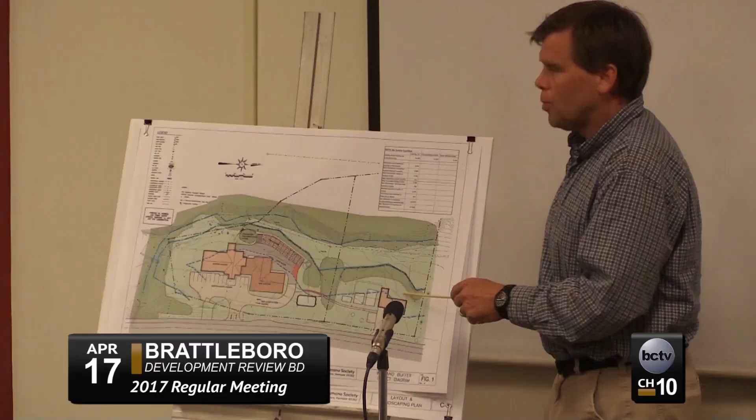And those uses are, so this is rural residential and animal sheltering. What's that? Animal sheltering. And the use that we're looking for is for animal shelter, but really just administrative and storage functions in this property, in this house here.

So storage of animals or storage of gear? There is an existing pool deck here that is proposed to be removed, and then eventually they would like to be able to put some kennels for some outdoor time on this south side of the house, so that this property will be connected by a path here.

How close are the closest neighbors that might be able to hear barking? There's a neighbor - Brian's right here, and he's the next property over. To the King property, it's 50 feet. Pretty close. So you're sort of just in that white area off to the side?

Yes, probably. Can you just identify yourself? Brian Young, 962 West River Road. Did I swear you in? Yes.

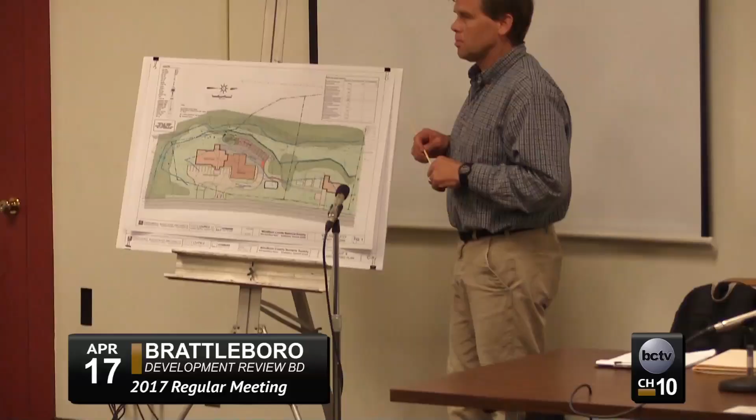So the kennels or open area, whatever you want to call it, when would those be in use? That would be during business hours, 12 to 5. It's not for overnight boarding, or for early morning or late evening use. It would just be the ability to get some more kennel space for crowding purposes. Would there be any strange lighting on the building that you'd be adding? No.

What would the use of that driveway be? The same as it's currently. You pull in and then there's a couple dirt parking spaces. We've probably formalized that, but the same. There's a garage and 2 parking spaces.

And it would just be a couple employees parked there rather than the tenants? Staff. The idea is not to have clients or customers come to the King House. This is strictly office and administration over here, with the exception of that outdoor area. Landscaping's not going to change? Landscaping's not going to change.

I should tell you that, as you saw in the letter, the property is subject to the Vermont wetland rules, and we've secured an individual wetland permit. The wetland is this darker blue line here, and whether or not it's a Class 2 wetland is up for debate, but the state took jurisdiction over it, so they asked us to get an individual permit. Among the constraints on this property, this wetland provided some significant challenges for us for developing this property.

So to answer your question about landscaping, currently there's a backyard with a septic system here, and they've asked us to do our best to revegetate the buffer.

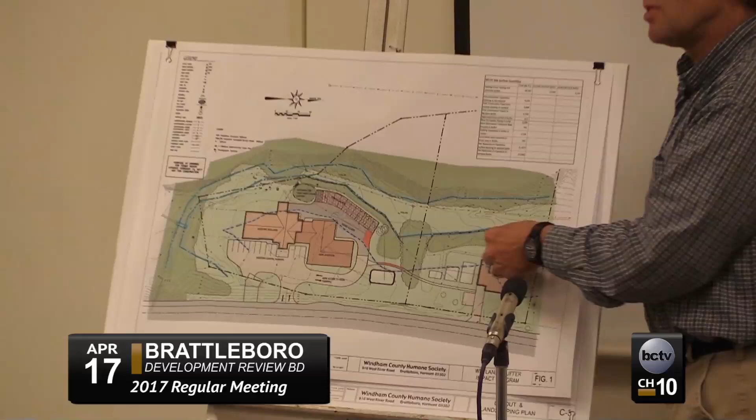So this lighter blue line is the 50-foot setback, and we're going to revegetate some of this buffer area along it. It's sort of the standard native species, native wetland species.

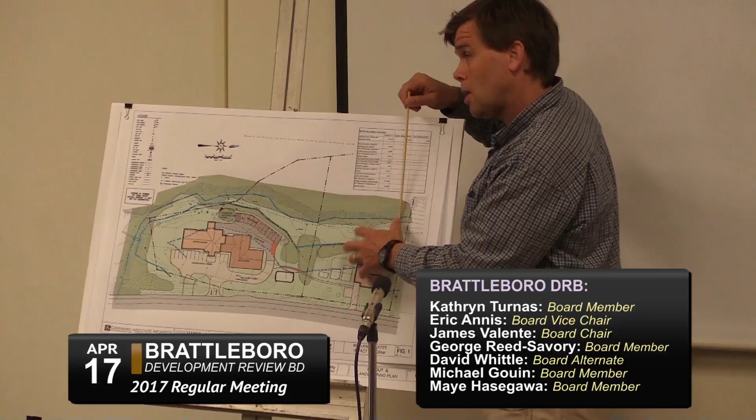Are there any runoff issues towards that abutter on the side there? No. There's a wash or gully that comes down off the hill here and lands on the King property house. The soils here are extremely well draining, sands and gravels, and this runoff doesn't even leave the property. It all infiltrates very quickly.

There's a bit of a low swale that runs the length of this and crosses the highway here, and that's largely dry 80% of the time, despite the fact this is a seasonal stream. It runs quite often and quite steady, but it never makes it off the property.

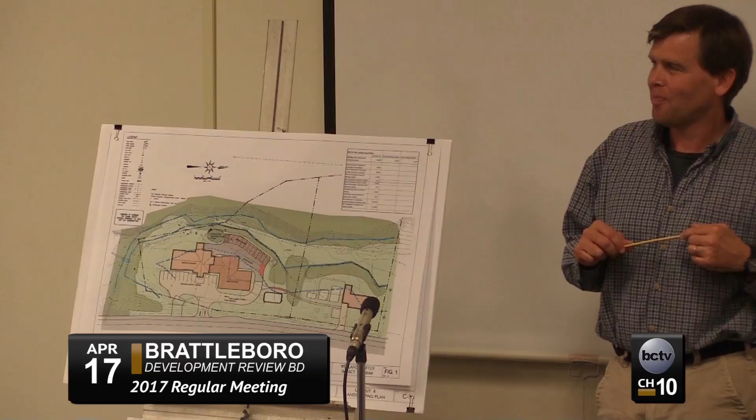I was just wondering if we put conditions on our last permit. Do you know? Well, we got a gentleman with the permit here. Sorry, your name was Brian? Brian Young. I've got it here, it's gonna go up to the line. Would it be all right if I just looked at it for a second? Yeah, I was hoping you would have it.

But your speculation isn't too far off, because what has happened is the runoff off the hill has come down and periodically fills up this area, and the water has pushed over into the yard. Over time, previous owners have redirected the water away from the house. So if you just let this run consistently, it might fill in down there again.

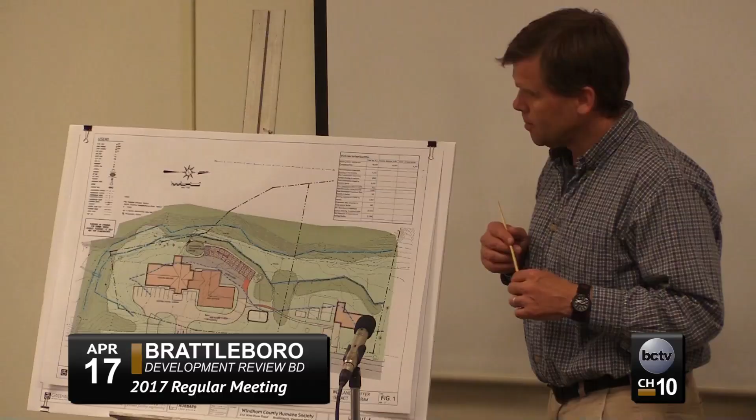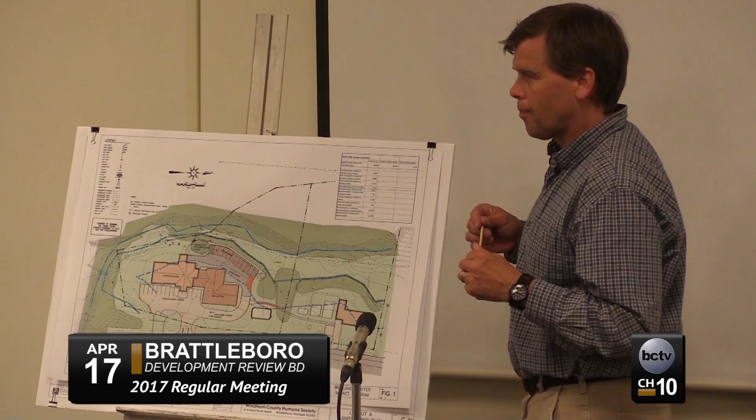Is the amount of visitors going to change as a consequence of this at all? No, maybe a slight increase here, but not significantly. Between 5 and 10 a day, maybe? What was the number, 5 and 10 a day? Excuse me, I didn't hear the question. I was asking if the amount of visitors to the Humane Society would change significantly, and then I asked if it would be 5 or 10 a day. Yeah.

Would you like me to continue talking about the King property, or should I move over to the main project here? I can tell you some more. Whatever you were going to talk about, continue. I apologize for interrupting. That's okay, ask questions along the way, I don't mind.

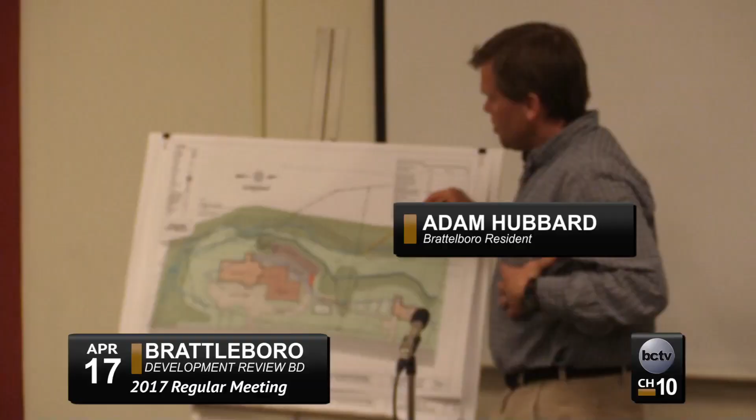So the challenge of this is as challenging a site for expansion as I've come across, because you have steep slopes, utility right-of-ways, wetlands, a highway right-of-way, and we also need to find space for a leach field and a septic system.

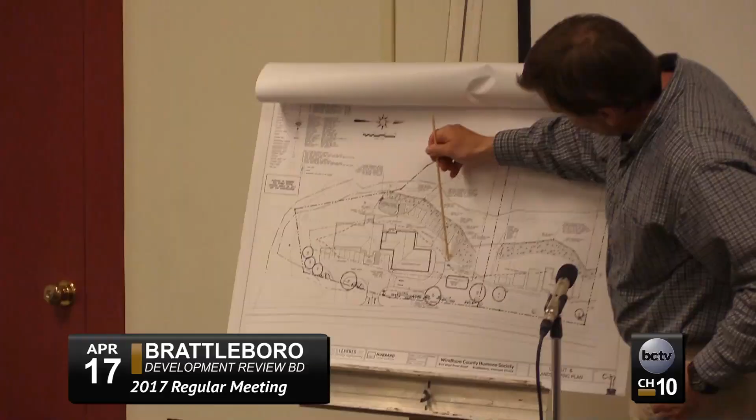The current system is proposed to be moved from where it is here over into this area. If you look at it with the setbacks here, you have the wetland buffer, the 50-foot wetland buffer, the front yard setback along here, and then the wetland. The leach field needs an isolation distance from roads, and we're going to need a waiver from the potable water and wastewater disposal division to compromise that isolation distance, which we've discussed with them.

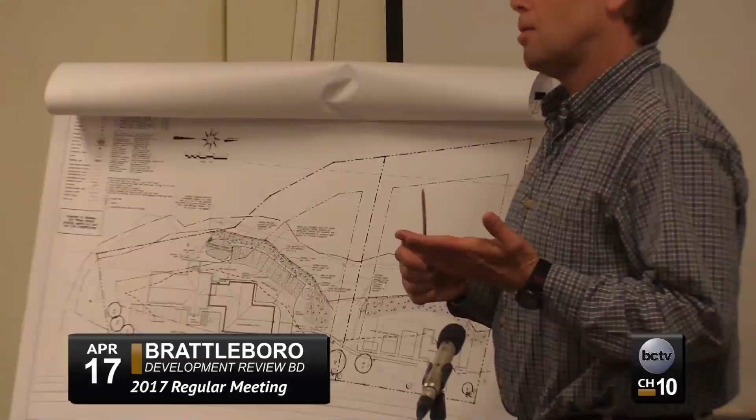So the building footprint you see at 4,120 square feet is really the only buildable area on the property. The challenge presented is why we've asked for some leniency on standards, including amount of paving in the front yard setback, landscaping for parking, and landscaping in the front yard setback, because we tried a number of configurations to access the parking in the back. Currently there's existing gravel parking in back resulting from removal of some buildings, like cabins, and a ranch house we took down a couple years ago.

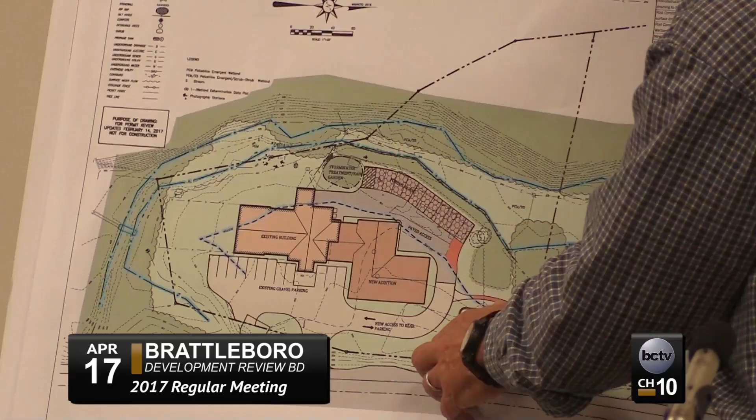So in the back of the property, there is some existing gravel parking that resulted from taking down some buildings. So in order for us to build any expansion, we were forced into bringing the access around the front and within the front yard setback. So we're asking for some leniency on that standard in the application.

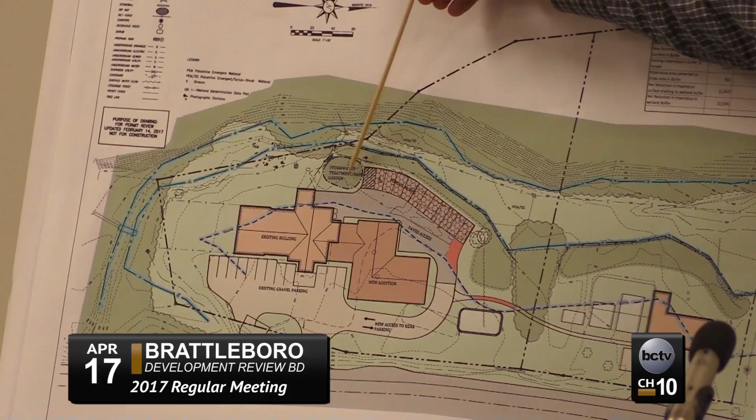These little red areas are the net increases, or areas within the buffer that are new impacts, so there's very little new impact. The existing parking was from here all the way to the edge over here. We've proposed porous paving for the parking area and a rain garden at the end of that, so we've actually been able to reduce the amount of impervious surface on the site despite the expansion and the driveway.

How close is the rain garden to the wetlands? I can see it's right on the edge. Yeah, it's about 15 feet from the wetland. Okay, and the same is true with the edge of that porous paving.

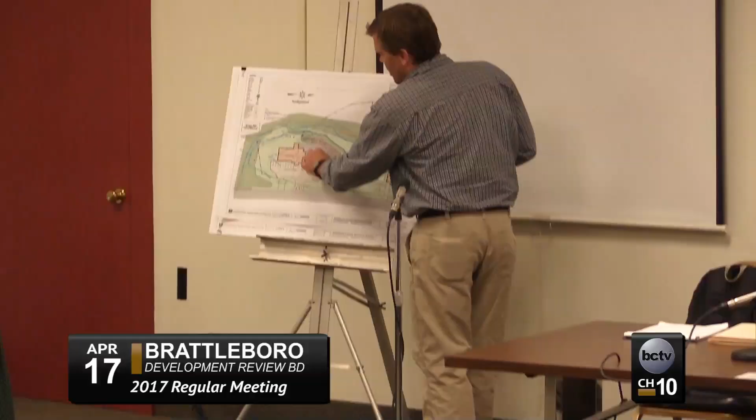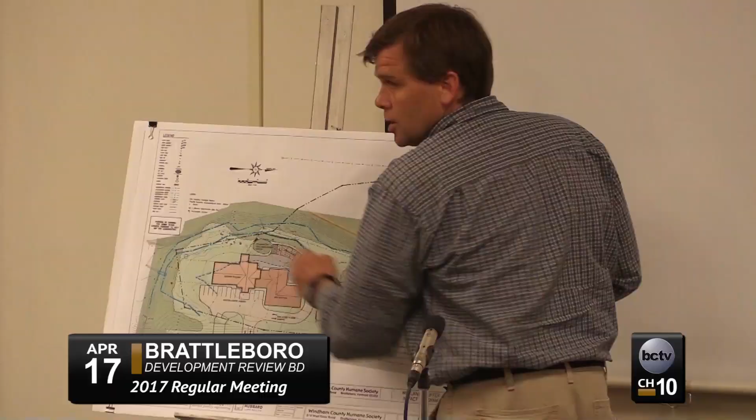This porous paving will receive runoff from about half of the building, more or less, then it'll run across paved surface and into this porous paving, which will provide storage and infiltration. When that is full, it'll discharge into the rain garden, and the rain garden will discharge into the wetland. The state wetland division has reviewed and approved that.

The landscaping you'll see, we've done our best to add some nice street trees along here. These are Princeton elms, so we've got 3 elm trees. The front side of this building will remain gravel parking and access and paved. We have to pave the back parking so that gravel doesn't fill up the porous paving, but this will remain gravel. This half of the building and this area of parking and access will discharge into a vegetated swale along the front of the property.

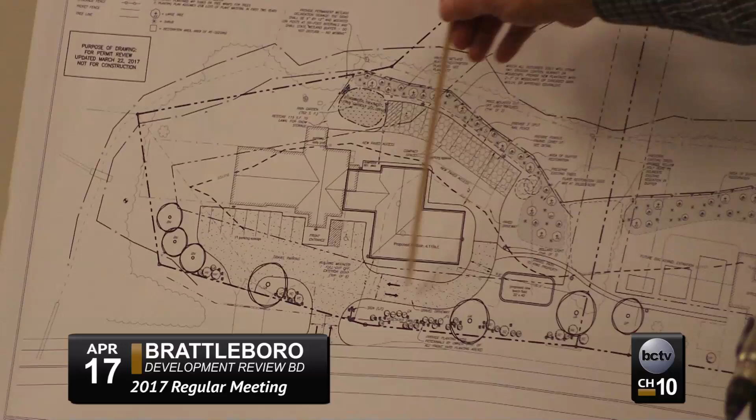These plantings you see are also wetland plants, native, similar in makeup to the plants in the buffer. We've asked for some leniency on the standard because this half of the parking is existing and takes up the front yard setback, and this proposed 18-foot access around the building also takes up a considerable amount of space, making it difficult to meet the standard on landscaping density.

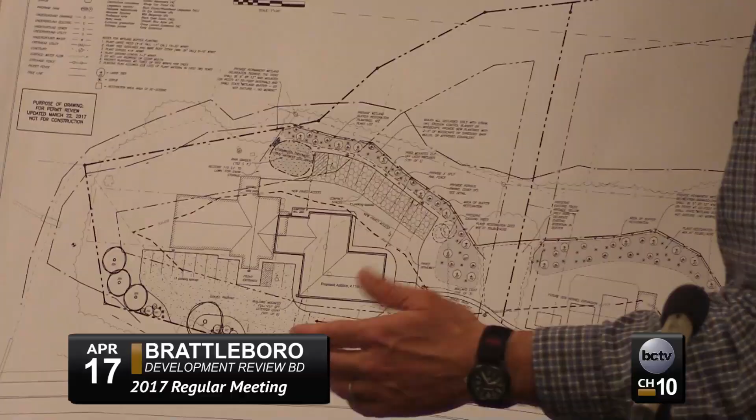You still need to maintain snow storage at each end of the parking lot. There'll be some minimal snow storage along the front. The state has asked for signage and a split rail fence to delineate the remaining buffer and the wetland.

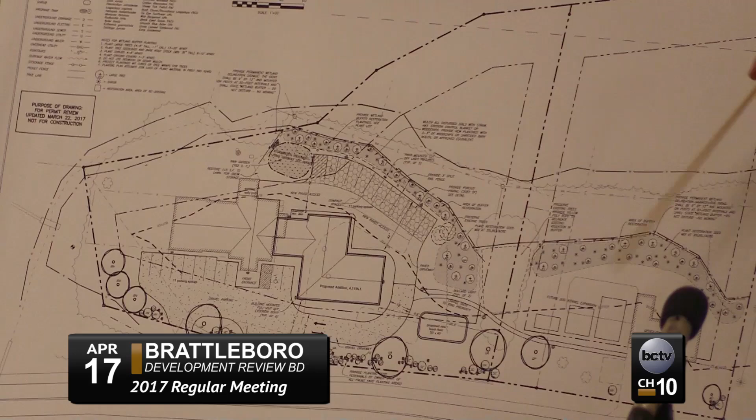And for lighting, what we've proposed is there's some existing building-mounted lights on the current structure, and then we'll light the entrances, one at the end, and one on the corner as well. The rest of the lighting is proposed to be bollard lighting, downcast, shielded, cut-off fixtures. We thought it would be nice to add some of those fixtures on the fence posts, keeping it low and directed away from the wetland. So with lighting on the building and some low lighting on the parking, we feel like we can make it a safe and comfortable situation for staff. This will be mostly staff parking back here.

So there will be no lighting fixtures in the buffer between the parking and the wetland? We have 4 post-mounted lights on the fence posts, so there will be low lighting between the parking and the buffer. But that split rail fence is proposed to be the delineation for the state's intended no-go zone. Lights will be off after hours? Yep, mostly.

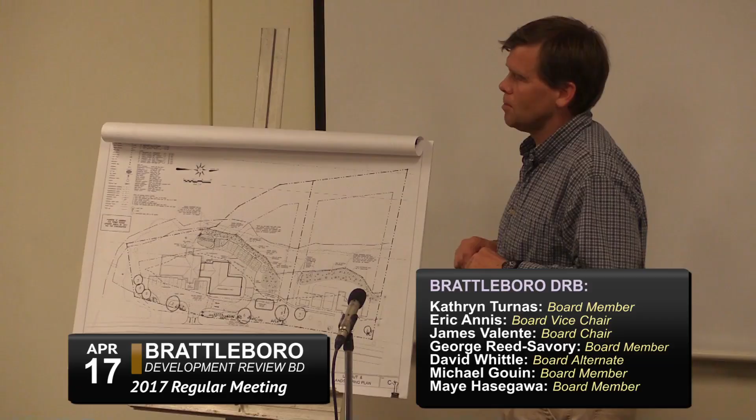They'll be photocell, or by timer, or by motion sensor - I think we decided on motion sensor actually. They're really just mostly intended to satisfy the winter month hours, you know, 3 to 6 p.m. But no lighting is expected to leave the site or affect neighbors.

Further questions from the board? How many employees do you have there at any one time? At any one time, 6.

So I guess it troubles me a little bit to have those parking spaces back out on the back of the wetlands out there. And as many times as I've driven by there, and it's a lot, I only ever see at most 3 or 4 cars parked out in front.

So what was the determining factor in putting all those parking spaces back? Well, you asked about employees, but when you add volunteers, currently in the back where we're parking, there's usually 7 or 8 cars there. And then I have volunteers that park on the side of the building because there's no room in the back. If you were there Saturday when we had puppies, I could hardly get in, there were cars everywhere. So there are these kind of ebbs and flows to the traffic if we have highly adoptable dogs or a spay-neuter clinic. So in general, I think that's going to carry the regular parking spaces very well, and on overflow days we'll probably be double parking or stack parking a little bit, but that's not going to happen often.

According to the square foot calculation for parking minimum requirements in the code, it's 1 to 300 square feet, I think, and that would put us at about 26 spaces. Yeah, and so we're asking for a reduction in that minimum down to 22 spaces. I think, based on our discussions, that 22 is sufficient for the current customer, client, staff and volunteer needs, but the ability to handle some bigger events is also part of the goal, and we're actually kind of challenged on that.

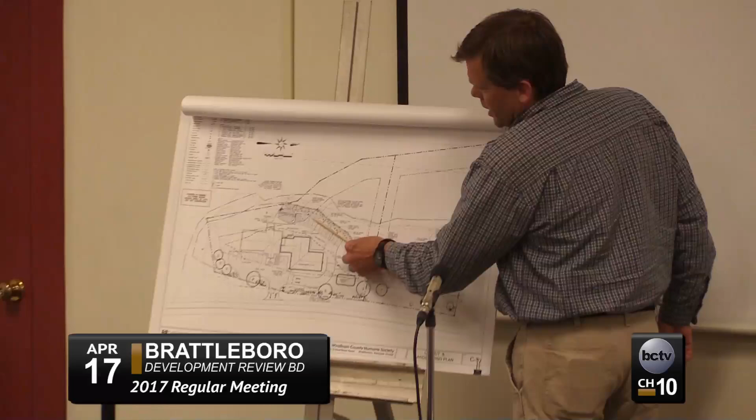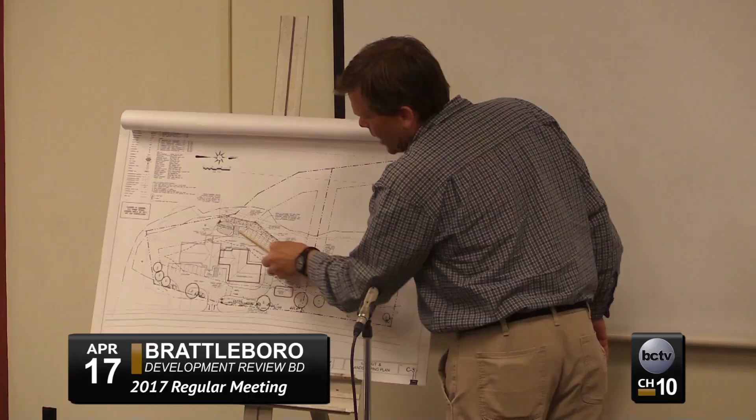So the rocks that are put into that parking area, the water that goes through that, where does it go? The drainage off the roof and the paved area goes into the parking stalls and infiltrates between either the pavers or through the porous concrete, and then it'll have about 2 feet of 1.5 inch crushed stone that provides a significant amount of storage, and then that will be directed to the rain garden, which will fill and then discharge. So it's not going to go over the back? No, it's not going to go over the back. In fact, this will be raised a little bit to prevent that.

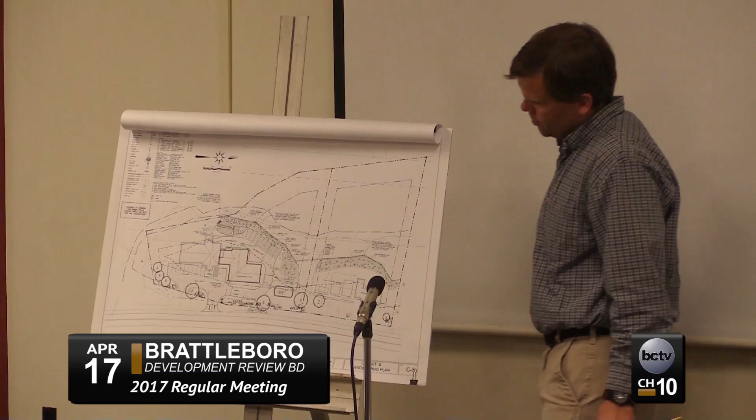So you have 2 additional parking spaces near the King House, right? Well, currently my tenant is married with 3 children, so currently they park 4 cars there. We envision my office and the Director of Development's office there, so we'd be parking 2 cars on a pretty regular basis, and we might have a visitor or 2 on occasion. That frees up spaces in the back. It does free up a space in the back, but again, when we bring up transport dogs from the south, we will need every space and more.

And on spay-neuter days and clinic days, on a daily basis in the morning when we're not open to the public, all you're going to see is 2 or 3 staff cars. If you drive by on a busy afternoon, you'll see the back is more full with volunteers, etc. And then on those high volume days, they're parking on the grass and everywhere they can.

I'd like to add, do you have more questions about the parking? Well, the only other question I have is whether the fire trucks can get around there into the back. Yep. We've run the template for the Brattleboro pumper truck to get around the back.

A point of discussion that came up with the abutter here, Mr. Young, is that he has a concern, and it's a concern that Annie has as well, about people going past the exit, past the entrance here. It's a fairly high-speed highway essentially, and with the building set back from the road, it's not as obvious as you would hope for passersby. His concern and Annie's concern is that people often drive past and then have to turn around. And it's a nuisance for Mr. Young to have people turning around with grandkids and stuff in the yard, and it's actually somewhat dangerous when people come by and then U-turn on the highway and stuff like that.

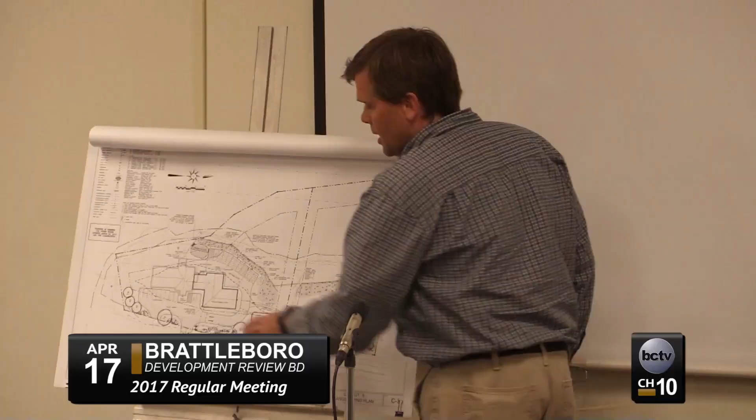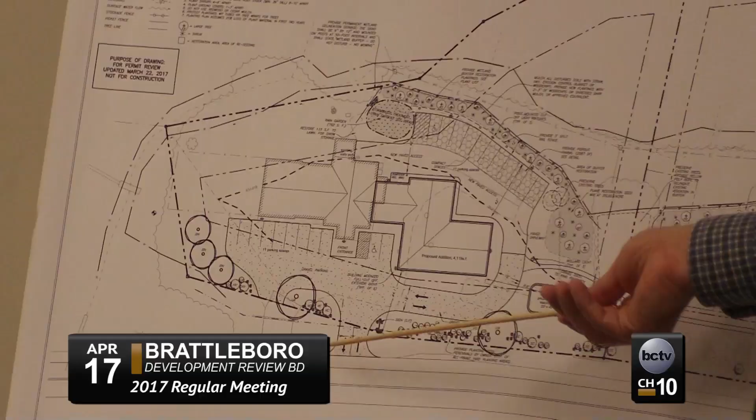So what we've tried to do, it's not huge, but we've moved the road access point down a little bit, and it will also be built up more. Currently, if you're driving out Route 30, the access sort of drops off the side of the road there. We've built that up a little bit, and the drop-off will be further in towards the parking. The current sign is right about here. We'll then be able to move the sign a little closer to the road. What we've shown here is a 22-foot wide opening, and we've been back and forth in discussions among the design team and the owner about widening that entrance.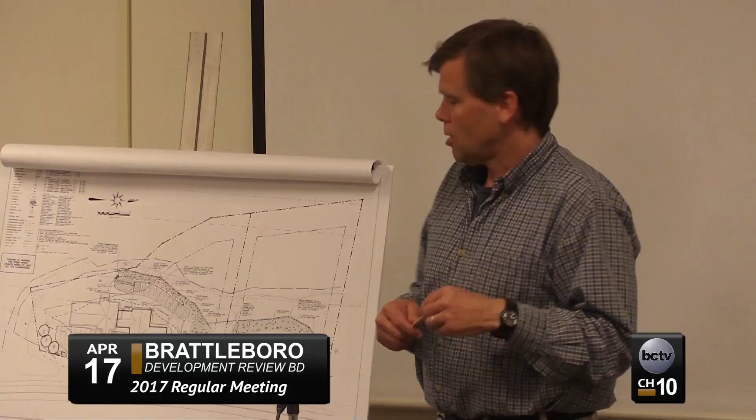V-Trans wasn't so keen on it, but they might be flexible if it met your approval, knowing there's a concerned neighbor, that if we widen this a little bit, it might make more of a presence. Widen it to 24 or 26 feet. It's a little excessive, but it's a unique circumstance in that we're trying to really announce the entrance, so we don't have this condition where people are zipping by, backing up, or U-turning in a neighbor's yard, or landing in the ditch. So I think what we'd like to ask is permission to widen it, whatever seems reasonable to you as a board. 24, 26 feet seems like a measure to deal with that.

Other board questions? I know we have one member of the public. Yeah, that would be me. Brian Young, 962 West River Road.

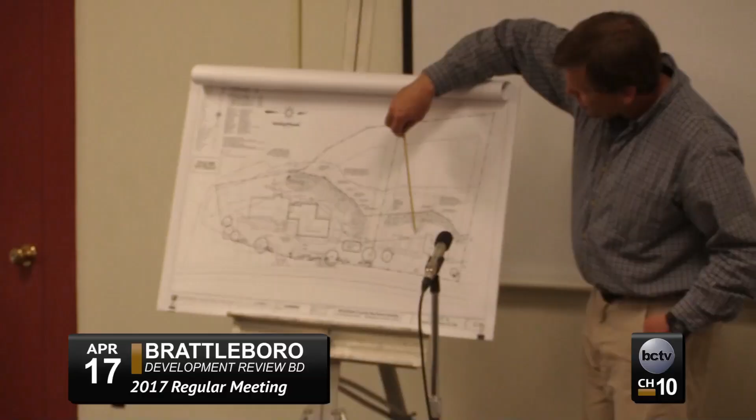Could you explain the kennels next to the King House a little more? That was new to me. So currently where the swimming pool deck is, we were thinking of putting some fenced-in kennel space, again for daytime use. It would be a place to have dogs out for supervised play by volunteers. Right now we have one yard, so you can put maybe one, two, or three dogs out to play together, and dogs playing together is one of the best ways to keep them happy. So it'd be fenced, three little fenced-in yards. Yep, and volunteers would come over with a dog or two and maybe play ball.

As far as landscaping and stuff, I'm not too good. I mean, I like this plan a lot better than what I saw in 2015. That was real general, that was our first stab at it. Yeah, and this I like a lot better.

And again, my concerns are any landscaping or work that goes on the King property won't affect my property as far as runoff. I'm not sure of the definition of a seasonal pond. It runs all year. In the springtime it's really running, and it does dry out pretty quick. But if there's any adjustments made on that property, I don't want it coming onto my property.

We discussed earlier perhaps adding a sign, and we'll be back for the sign permit at a later date. This one will probably be very similar to the one that exists here, but in discussions with Mr. Young, we thought maybe adding another sign at this entrance, and like I said, administrative offices, would just give another visual cue to people.

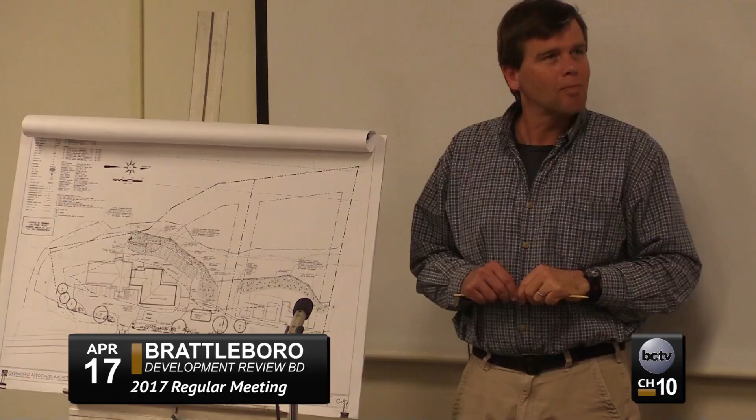Right, that way if they miss the first driveway, they'll see it and can turn around in her driveway instead of mine. Very good idea. So I think that's all I've got to say. Thank you very much, Mr. Young. Are there any other members of the public who'd like to comment on this application?

Any questions? I'll just note that a no runoff condition would make sense, as well as a landscape screen approved by the zoning administrator on the north boundary, and the 26-foot entrance. 26 feet seems appropriate to me, but I don't know if you guys have different feelings.

I wonder, wasn't somebody killed down there, a couple tenths of a mile down? Oh yes, it was up a little bit further. Yeah, that's the problem with that nasty stretch of road. It's the first passing zone once you get out of Brattleboro, and man, they come screaming by. Yeah, that seems to me to be very sensible.

I tried to get them to move Route 30 to the other side when I built a bridge, put it over there. I almost daily am sitting in my office watching because somebody will stop, then pull into the breakdown lane on the wrong side of the road and back up. They'll do everything. It's not good.

George, I interrupted you. No, that's okay. I just wonder if we make the entrance wider, would that encourage two lanes exiting the property? In previous iterations, we had a 3-lane entrance so you could wait and go left while somebody else turns right. We determined there wasn't enough average daily trips to warrant that slip lane.

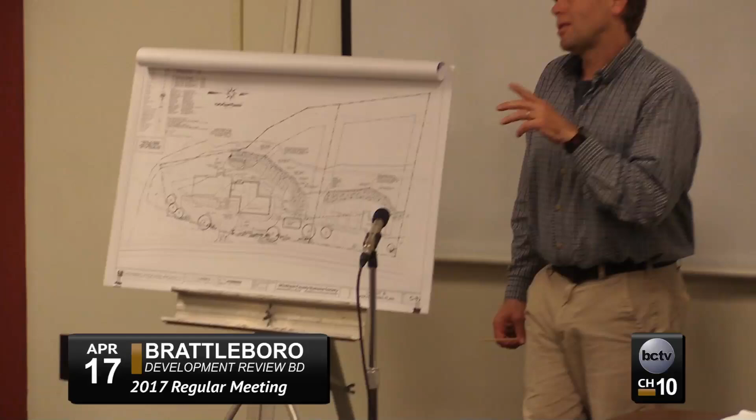Let me just think. If you had two 10-foot lanes and a 12-foot entrance lane, a typical one is 32 feet wide. So 26 feet wide is not really enough, and if we mark it adequately, we'll have to have a paved apron here anyway. We can mark it so the exiting lane is a strict 12-foot lane, and the entrance lane a little wider, painted as 14 feet. So we can have a one in, one out condition. One in, one out, yeah. I think line marking that way would alleviate that problem.

So where are you going to put the office space? Is there going to be a driveway into that space, other entrances in? No? Okay, so it'll just be one entrance, and what we're talking about is making the entering painted aisle a little wider, and the exit aisle the standard 12-foot width. I'm confused about the turnaround - I wasn't figuring that. No, just at the King House, it would just be a turnaround in a parking space. Oh, okay.

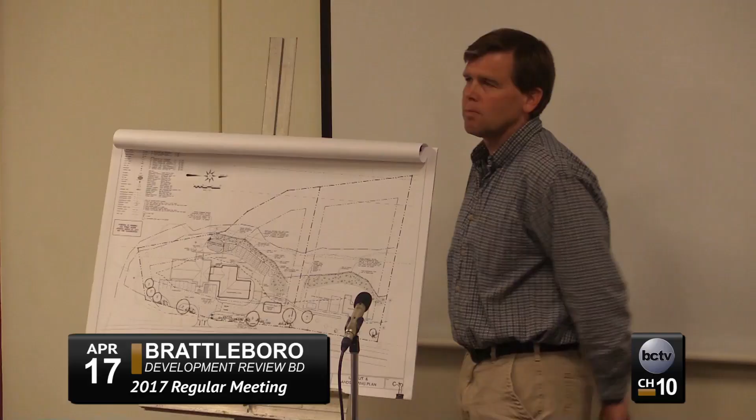Any other questions? Do we all agree that it's appropriate to approve the application as proposed, with landscape screening on the northern boundary, condition that runoff towards that boundary not increase, a 26-foot entrance if the state approves it with one lane in and one lane out, and the vegetation landscaping over on the right. Yeah, that's right, I said that.

Was there a fire department report on this that they wanted a Knox Box out there? That's just standard - we'll add the standard condition, whatever the fire department says, they've got to get approval. Could you forward me a copy of that? Will do. So, can I get a motion so moved?

So moved. Second. Any further discussion? Hearing none, all those in favor? Aye. Any opposed? You got our first unanimous vote of the night. Thank you for coming, thank you Mr. Young, thanks for the work that you did.

I didn't know that was the road that I wanted to take. Congratulations. Go easy on them. I know they do. They've been through a lot.

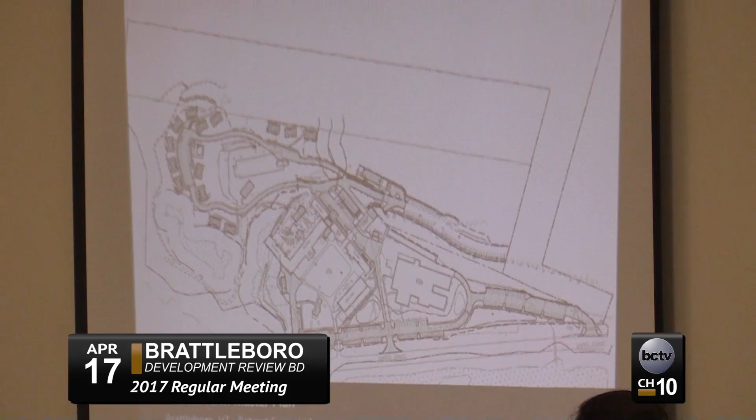There we go. So the concept to realize the overall Retreat Farm visioning is constrained obviously by the site. And the site as it exists today has 2 vehicular entrances on Route 30, here and here. This one was closed as part of the last approval that came before you guys. There are 3 terraces topographically. There's the lower terrace, which is built out with the existing farmstead. Grafton Cheese is on the lower terrace. There's the middle terrace, which you can see, this was the former location of the piggery. And then there's the upper terrace.

So all of these things are geologic, they're not man-made. It's actually a really interesting geologic setting, neither here nor there for this presentation.

This concept was made to fit within the existing setting. The circulation comes in off of Route 30 into one of these two entrances. This is the third entrance, which in the future will be where trucks are directed to go. It's also the overflow parking up here.

This is the first set of things that happens in the lower terrace. Then we move on up to the middle terrace, and finally up to the third terrace for the final phases. Buzz is going to talk about phases a little bit later.

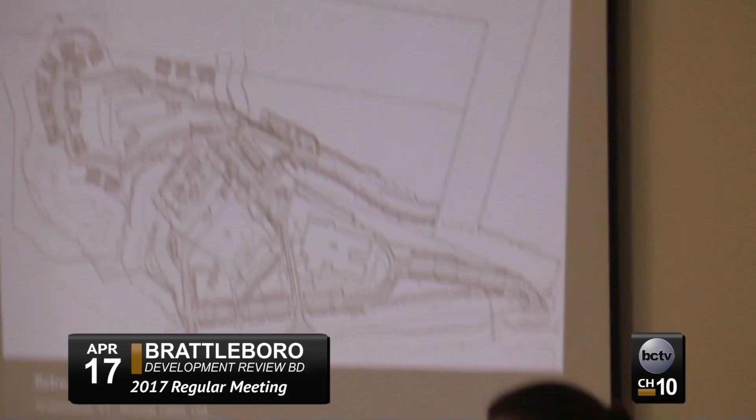This project is subject to 1111 permitting, and that permit application has been submitted. The project is also subject to wetland permitting, state wetland permitting, state stormwater permitting, construction and operational, as well as wastewater and water supply permits. All those permits are going to be applied for, as well as an overall Act 250. We've requested the jurisdictional opinion letter from Act 250, and we have not yet received that, but we can forward it to you when we do.

A couple things I wanted to point out that have been added to the plan since it was first submitted to you. One, there were a few places where guardrails were missing, and those have been added anywhere the slope is steeper than 3-to-1 to protect both vehicles and pedestrians. We've added signage for accessible parking, and we've added one sidewalk, which I'll point out later.

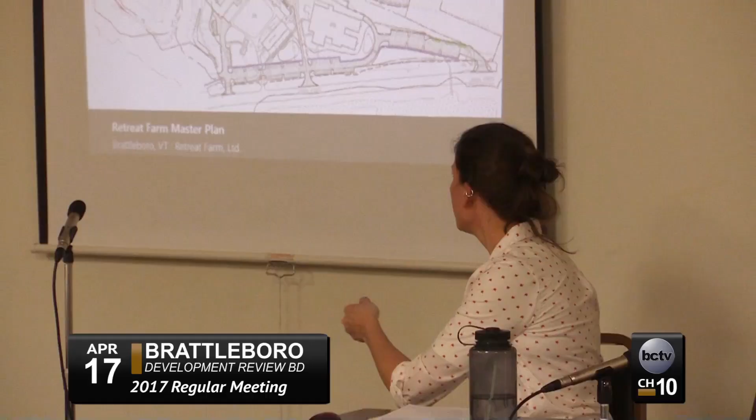The green doesn't show up particularly well, but there is accommodation for buses, tour buses or public buses, if they become available over time through the MOOver. The buses will access the site here, and there's a drop-off area, and then we provided for 3 bus parking spaces, which are included in our parking count at this end of the site.

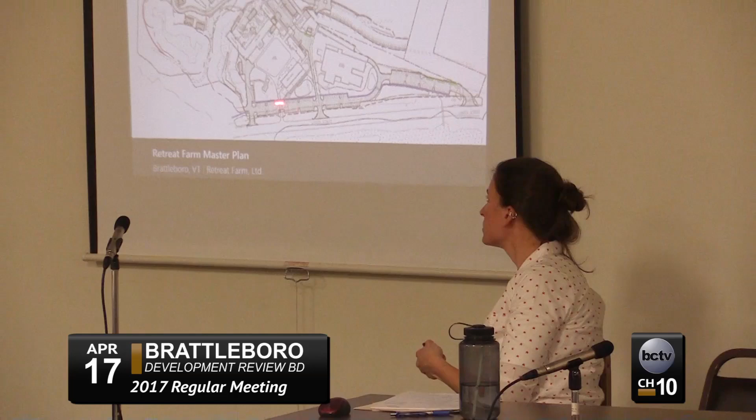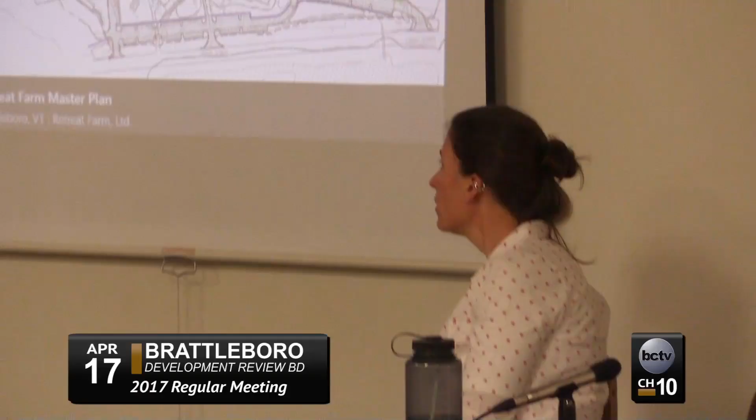The other modes of transportation we're accommodating are bicycles. We've placed our bike rack close to Linden Street. As a cyclist, I know that if I'm looking for a bike spot, I'm not going to think to drive way up here, so I'm going to park at the closest spot, or wherever there are signs or fences to park against. I haven't had to come up here yet, so we put the bike parking close to where people are likely to access the site. If there's demand for bike racks in the future, which would be great if we have more bike users, we'd be willing to add more bike parking as the project develops.

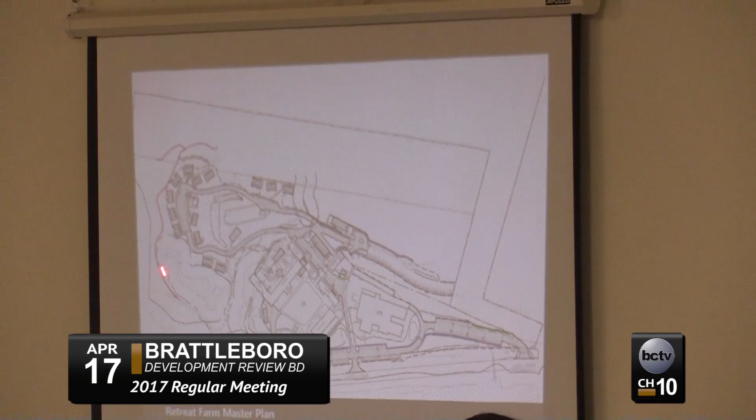The other thing I wanted to mention is the Retreat Farm trails, which we're adding a little bit through the project to make some additional connectivity to the existing trail network out here, and then there's a little bit out here. Those are shown in pink on this plan.

The only other thing I wanted to mention is the noise. We did review the administrator's review of the project, which mentions the noise study that we prepared. It appears that in the zoning regs, noise is supposed to be below 45 decibels as generated by the project in rural residential zones after 4 p.m. We interpret that to mean noise generated by the project, not total noise. So, and please correct me if I'm misinterpreting this, the existing sound levels in the adjoining neighborhoods are all above 45 decibels. So with the project, it remains above 45 decibels, but with the project alone, it's below that threshold.

It's 70 for house to house. 70? I think you're not supposed to go over 70 decibels. Oh, during the day, and then there's an evening limit, right? Oh, it's changed? Okay, well, never mind. Continue. Do you know the answer to that question?

But the board does have the power to allow projects to exceed those sound levels, so you could put a reasonable limit on sound from entertainment. And if there are concerns about noise going forward in the future, the project is willing to seek an entertainment permit as needed, but the flexibility and the inherent uncertainty lead us to not pursue that at this time.

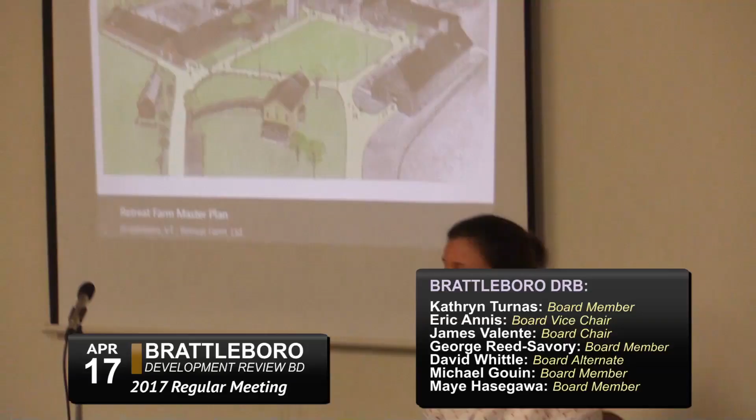Just to show you, this is where we are today with our current permits, and this is what you'd expect to see this summer with the completed farmhouse, the farmhouse square all landscaped.

In red here, the Children's Farm and Forest program. Basically, the petting farm has moved over to this side and will now open up into these 12 acres that surround it, for animals on pastures, nature trails, gardens and so forth up here. That's the first phase, and that's not really the subject of this hearing.

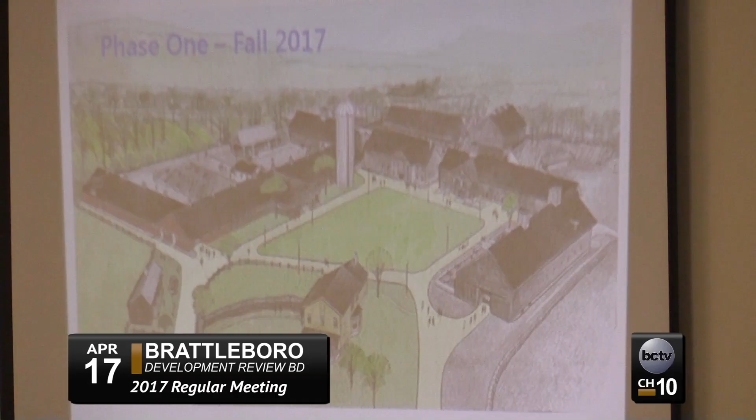The second phase will see a modest renovation of this structure, where Food Connects hopes to establish the rudiments of a physical food hub here to support local agriculture.

We would hope to transform this barnyard area back here, the one with the 18-inch thick concrete pad on it, including this pavilion here, a new lawn here, raised beds here for an intergenerational garden, and hopefully restoration of the hay barn over here into auditorium space.

We also hope to move the blacksmith shop, which was here but is now sitting—we lifted it by crane and it's sitting in a bunker back here, awaiting approval to move it here where it would be restored, right here, and become part of the children's program, either as a museum of the retreat farm, a classroom, or perhaps a new entrance area for this complex. We haven't figured that out exactly yet.

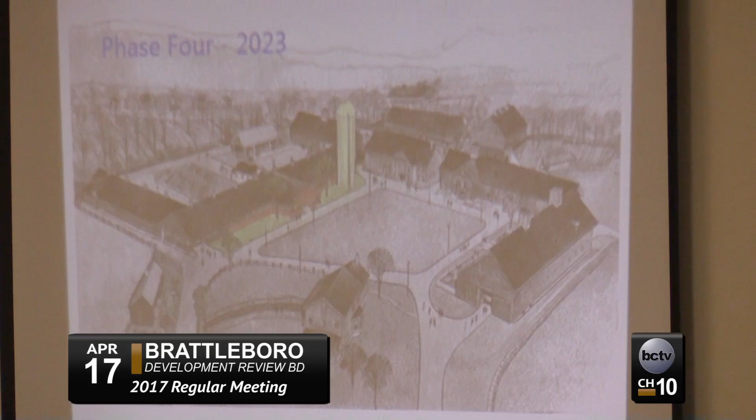Or possibly artisan space. We're talking to some local groups about artisanal uses—not food artisanal uses, but artistic uses.

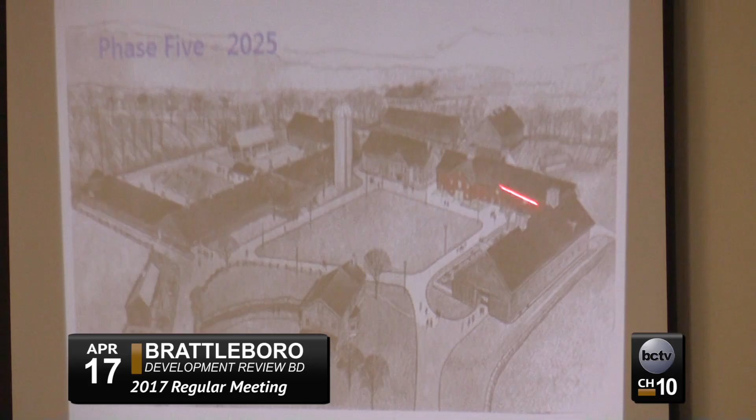This would be later again, and it would have to be after other value was established in this village of enterprises, but we'd hope that this could become a more upscale restaurant with a cooking school and perhaps a commercial kitchen that would interface with the Food Connects food hub here and the market here promoting local production. So that becomes a food corner at some point in the distant future.

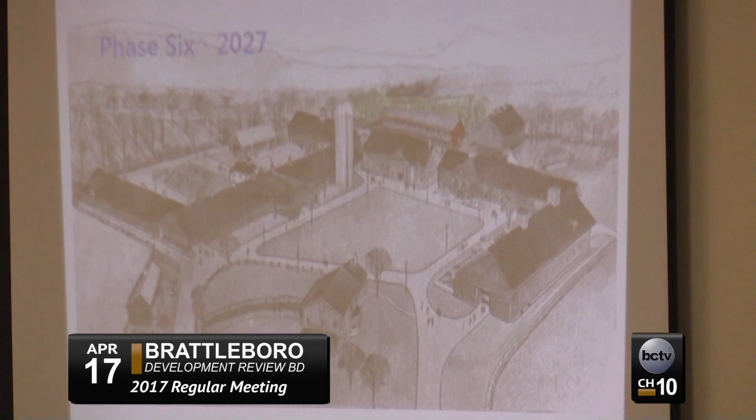So everything you've seen thus far, other than the small pavilion here, which is really replacing a large shed which we will have demolished, everything else is existing structures.

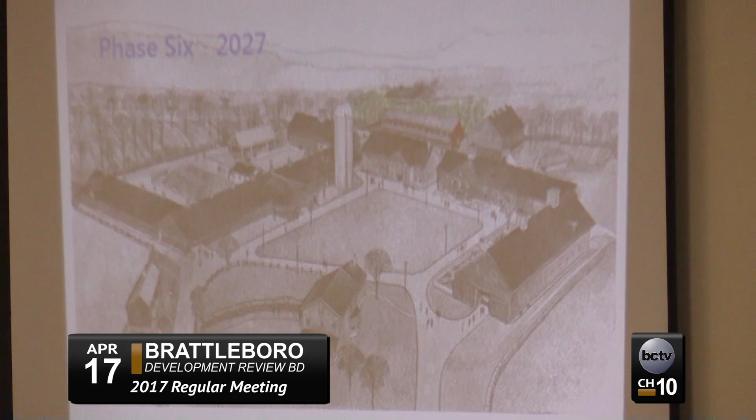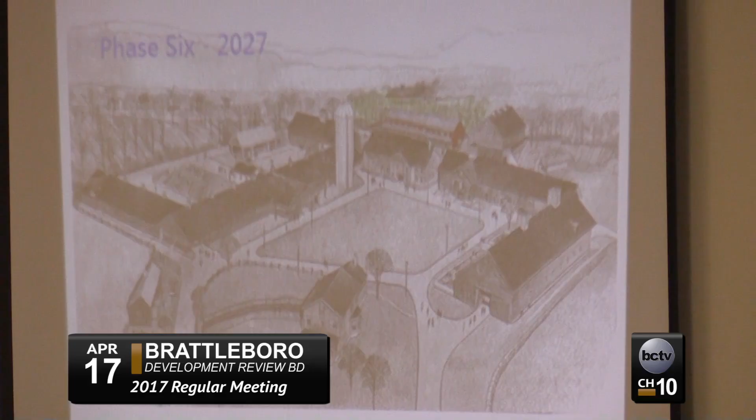We're now going to talk about two sets of new construction, two sets of buildings that are new. This one here we call the Enterprise Barn—it's a new barn that we'd seek the permit to build. It wouldn't be built without demand, but we hope that some smaller food processing organizations would move into this clean structure, maybe four, that could operate effectively there.

And that wouldn't be till another 10 years. And then the last one is an eco lodge, which we wouldn't expect for perhaps 15 years. That's the one that would inhabit that upper terrace that Marla referred to.

But you can see this would be the base lodge up here, and then you can just kind of make out some cottages up here in this upper terrace.

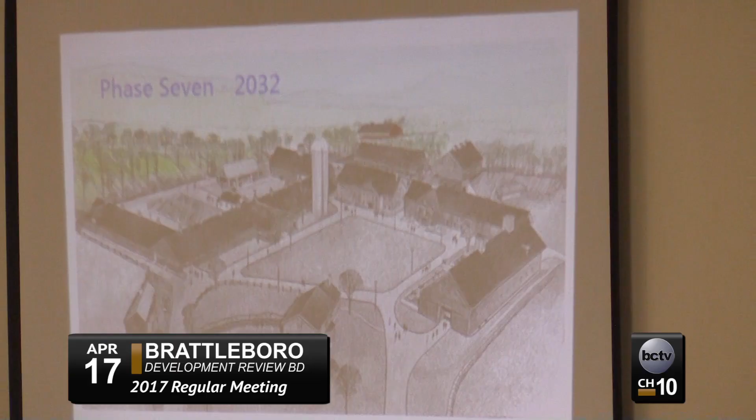So, as I said, this is a scenario really, and we will have to work very closely—or we hope that you will determine that it makes sense to leave the relationship with the administrator as we get to each phase, so that he or she at the time can confirm that we're consistent with our permitting, and that the requisite infrastructure is accompanying the successive construction.

That's what I have. So I just want to talk briefly about the phasing. We have pictures of the... sorry, didn't warn you about this one.

So these are the future buildings that Buzz just briefly touched on. This is the Enterprise building, which would contain light manufacturing, yogurt making, basket weaving. It's adjacent to the refrigerator building that already exists. And then this would be the base lodge for the cabins and the Eco Lodge program.

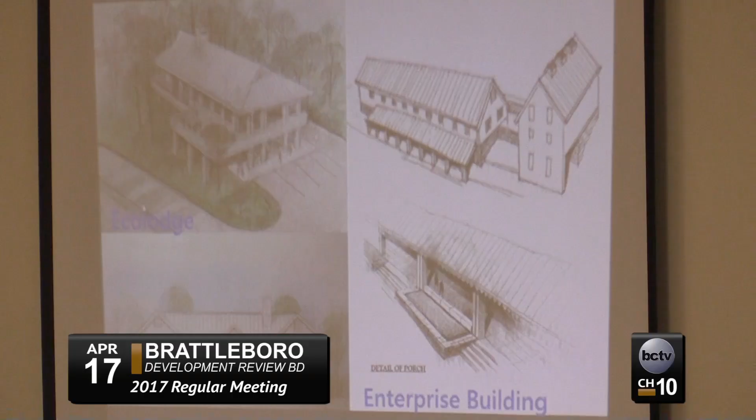I did want to clarify the cottages/cabins are non-residential. They would operate in a manner similar to a hotel.

Oh, I'm sorry, go ahead.

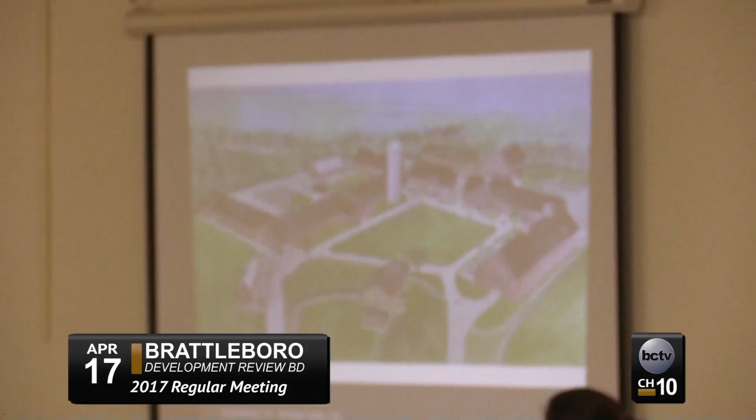So this is the whole project altogether. As we talked about, the phasing is designed intentionally with the project layout. All of the things Buzz talked about in the first several phases are within the existing tier. The only building being proposed for demolition is the existing pole barn in the barnyard square, which would be replaced by a smaller pavilion.

The old sawdust shed? No, the one that's coming down. Yeah, it's 75 by 35.

The silo would stay and become part of the features of the program. As you can tell from the existing imagery, if you look through the site plans, there's not a lot of parking or formalized roads.

The roads are designed to accommodate the phasing. This road can be built as needed from the beginning; it connects the existing access road over here. This parking can come online - it already exists and will only require small improvements. As we go forward, the parking over here would come online, and the road up to the Eco Lodge can come online without much disturbance of what's been constructed in the earlier phases down here.

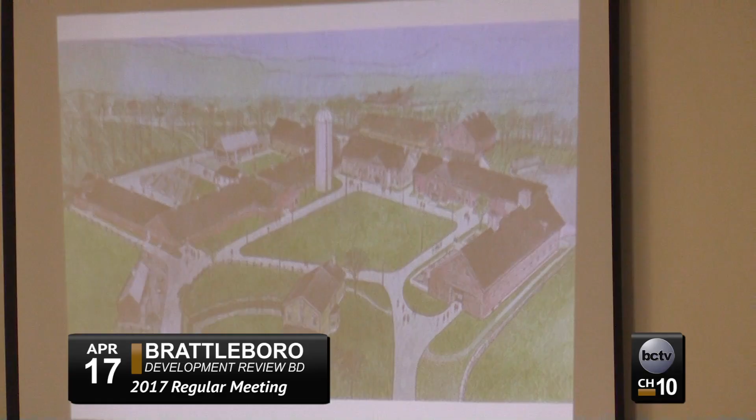So I just wanted to say one other thing: this whole project has been planned in concert with the Windham Foundation, which was the owner of the property until last August, when it granted the property to the new nonprofit organization, Retreat Farm.

As part of our long-term operating agreement, which is recorded, we're coordinating all the parking, landscaping, signage, and all that kind of stuff. So the Grafton Village Cheese Company will, in effect, while having its own identity, be very much a part of this community of organizations.

Thank you, that's very helpful.

You don't want to pave the parking spaces because you want to keep it like a farm, right? Well, yeah, and was there also some requirement that they be gravel? No? Okay, I just want to make sure I understand the waivers you guys are applying for. Yep, that's fine - I'm just clarifying that what I assume you're doing is actually what you're doing.

And the sidewalks will be gravel. We've limited curbing to the extent possible - there's only one tiny section of curbing as you come up to the upper tier, needed to redirect stormwater. The curb stops are proposed to be timber as opposed to concrete, in keeping with the agrarian setting. In lieu of the sidewalk, you're redirecting into the property, right? Yep.

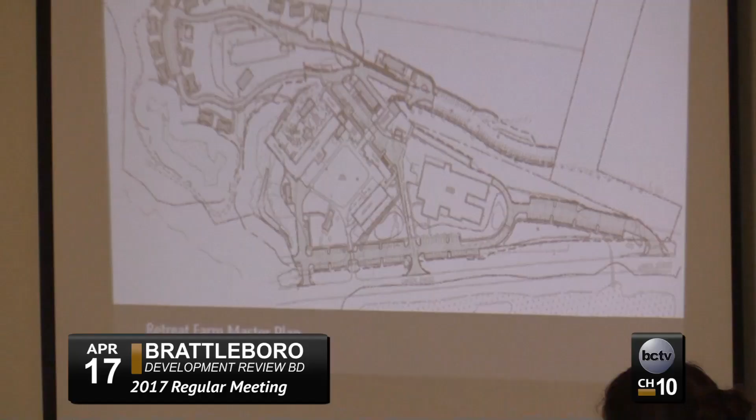So you want to keep the parking lots consistent in design and not disturb too much? Part of the reason we're seeking an 1111 permit is this black line is the property line, and the street trees in this area would be within the VTrans right of way.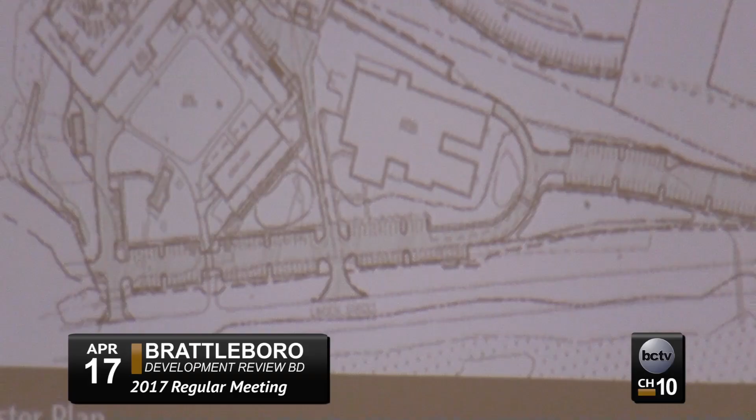Those are all my questions. Other members of the board? I'm curious about the use of alternative energy - have you considered the possibility of solar? We would love to have solar.

All of these historic barns are under a strict preservation facade easement with the Preservation Trust of Vermont, and they're all antique slate roofs, so they would never let us do that. There's one possibility on the south roof of the cow barn, which does not face the square, and we'll definitely look at that to see if it's possible.

Because of the phasing and our inability to have certainty about renovating all the buildings, it's hard immediately to introduce a district heating system, which would let us investigate pellets or chips as fuel. But as we go, we're piping - putting in passive radiant pipes in the floor - so we can convert to it, but we'll use heat pumps for the most part in the interim.